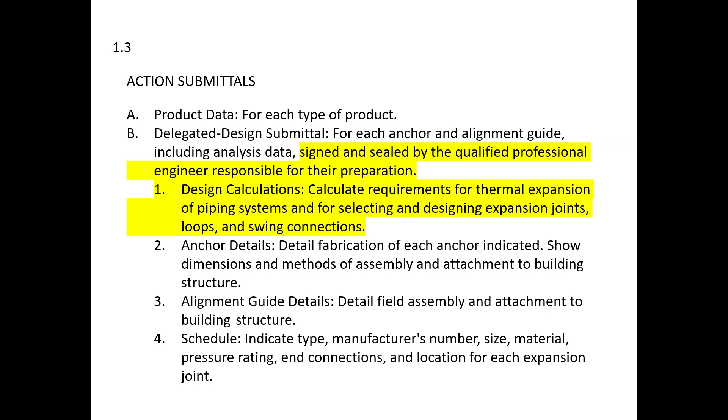What is delegated design? It is when the engineer of record delegates the pipe expansion responsibility to the contractor. Delegated design is not confined to only pipe expansion. There are several other building system designs that may also be delegated to the contractor. Vibration isolation and fire protection systems are examples of systems commonly delegated to the contractor.

When a contractor signs off on the contract, they assume the responsibility and the risk involved with the design. For a pipe expansion delegated design, the project team and building owner rely on Metraflex and our reps to get the design right.

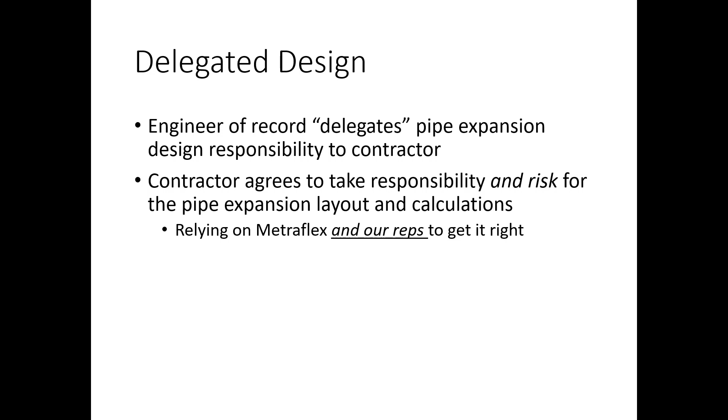Why use it? There are several good reasons. First is to keep up with the most current codes and standards. Manufacturers are going to be the most up-to-date on revised codes and standards for their products. Second, technology evolves rapidly. It is nearly impossible to be expert on every component going into a building. And third, delegating can save valuable time and keep a project on schedule and within budget.

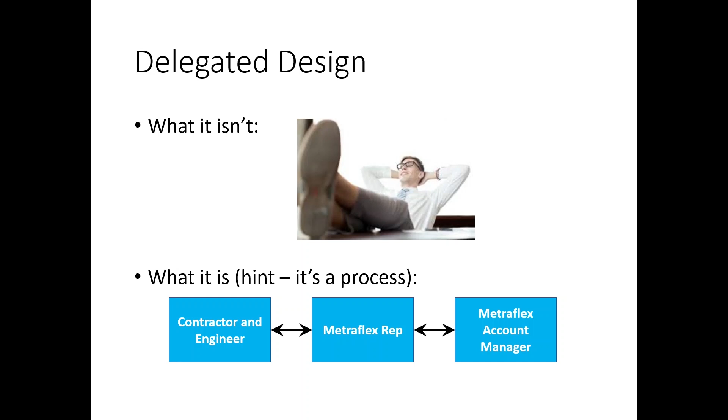Remember that a delegated design is a process, not just a stamp. It will require close coordination between all parties involved. To be successful, a delegated design requires communication between the designers, installers, Metraflex reps, and Metraflex account managers.

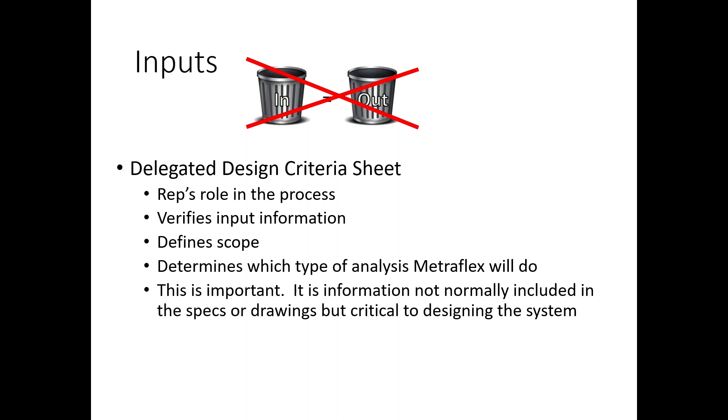The most critical part of the process is to get the design inputs correct. This is where Metraflex must rely on our reps to verify the input information, define the scope of the project, and determine the type of analysis. This is important because some of the information will not be included in the project specs.

The Delegated Design Criteria Sheet is the most important document for the project. It contains all the required information in one place and is completed by the customer. The Delegated Design Criteria Sheet is divided into 3 sections. The top section contains relevant project information, the center section contains information about the systems to be analyzed, and the bottom section is for seismic and settling information.

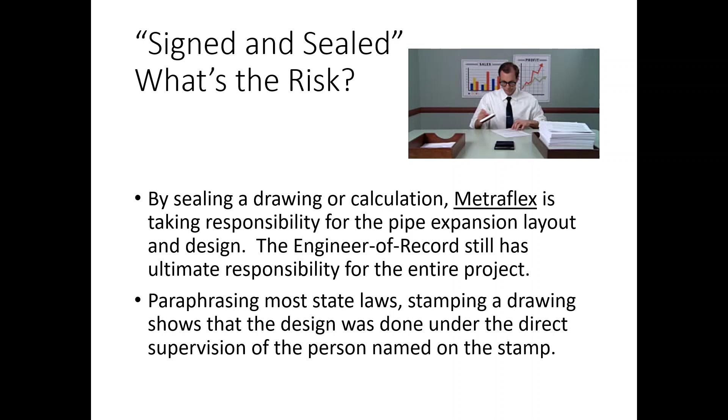So what's the big deal about a stamp? Does the stamp mean the layout is correct and it will work perfectly? No. By sealing a drawing or a calculation, Metraflex takes responsibility for the pipe expansion design. The engineer of record, the person who stamped the plans, still has ultimate responsibility for the project. Paraphrasing most state laws, stamping a drawing shows that the design was done under the direct supervision of the person named on the stamp.

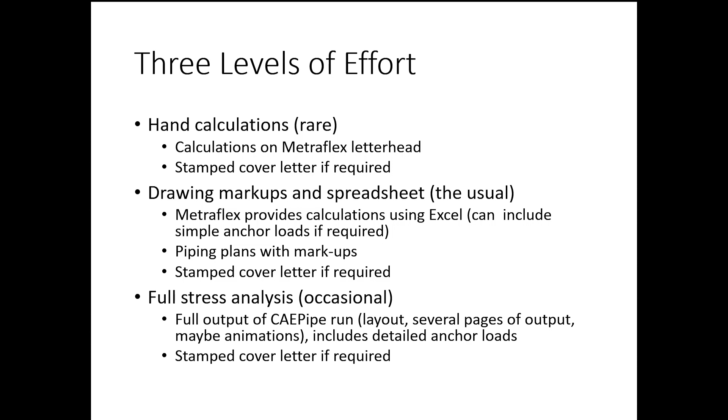Delegated design can involve 3 levels of effort. The least involved will be hand calculations with a stamped cover letter. The most common is the drawing markups and spreadsheet listing all expansion joints and movements plus simple anchor loads. The most involved project may require detailed anchor loads and a complete stress analysis. For these projects, Metraflex uses CAEPipe analysis software.